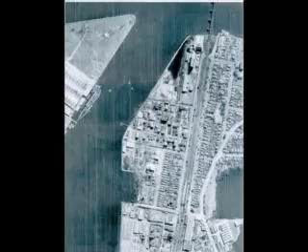The Rhodes Peninsula is an industrial wasteland. Over the last 2 centuries, it has hosted a series of environmentally disastrous activities which have left the soil soaked with pollutants and the water saturated with poison. In the 18th century, the peninsula was a residential area.

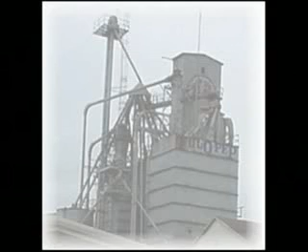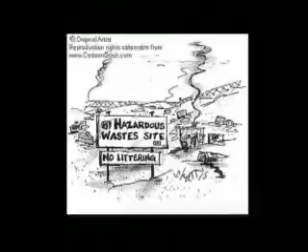In 1930, Allied Feeds established a flour mill on the site. A timber treatment plant was added in 1942, then a gasworks. Then during World War II, an explosives factory. Union Carbide reclaimed land using industrial waste, then pesticides and herbicides were made on the site. Chlorobenzenes, chlorophenols, dioxin, furanes, and Agent Orange.

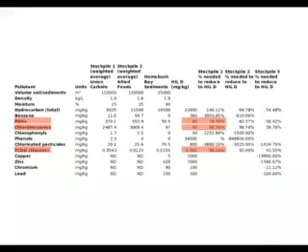Today, internationally renowned environmental scientists agree the peninsula is one of the most heavily polluted sites in the world. Current remediation by developers has pushed down the levels of most pollutants detrimental to the environment or to human health. But, according to the National Environmental Protection Schedule, the levels of chlorobenzenes, PAH, and dioxins still exceed the HIL D standard and need immediate attention. In order to meet the HIL D standard, we must lower the levels of these pollutants to 1% of their current levels.

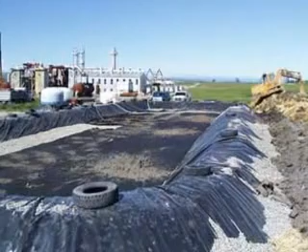The traditional narrow-minded way of approaching this problem is to use a messy technique like thermal desorption, or a slow, tedious technique like in situ biodegradation. EcoImpact knows that developers can't wait around. Our method uses cutting-edge technology to bring the entire site to standard within 1 year at a competitive price.

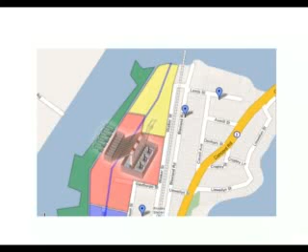Let's take a look. First, the site on which the plant is to be constructed will be excavated to a depth of 5 meters. This allows construction of the plant to commence immediately on the floor of the excavated pit, the walls of which will be reinforced with concrete. Once the plant is constructed, excavation of the rest of the soil will commence.

The Rhodes site will be partitioned into 10 meter by 10 meter cells. Excavation will begin at the northmost cell and work southwards in east to west rows. This prevents rainfall from washing contaminants from untreated soil into the cells which have been backfilled with treated soil. Water sprays will be used to suppress odor and dust emissions. Excavated soil will be transported by truck to the stockpile area of the plant. Once the soil has been treated, it is backfilled in the same east-west pattern.

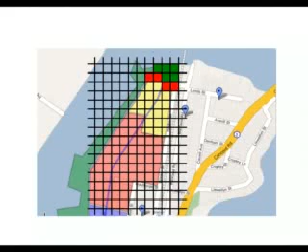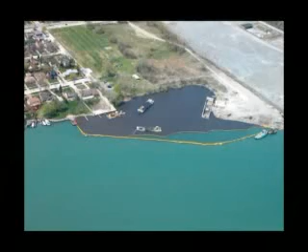The Homebush Bay sediments will be extracted using a floating dredger, which pumps the sand into a waiting truck. It is then processed in the same way as the soil. Silt curtains will be put in place to prevent sediments from building up in unwanted areas in the bay.

Now onto the plant itself. The lower part of the plant machinery sits at the base of a pit, 5 meters below ground level, while the upper part is contained within a warehouse. Let's take a bird's-eye view of the path contaminated soil takes through the plant.

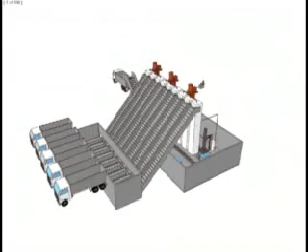When a truck carrying excavated soil arrives at the plant, it dumps it through the warehouse dock. Water is sprayed onto the soil to minimize dust pollution. A soil grader separates out large rocks and waste, dropping the soil into this covered stockpile area. At night, when excavation ceases, the dock can be closed to add an extra layer of soundproofing. The majority of the plant is underground, and as this graphic shows, the upper portion is well sealed and whisper quiet.

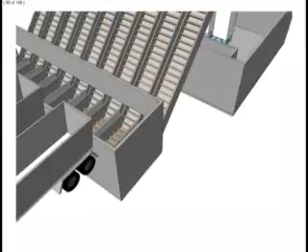When an extraction tank is ready for filling, soil moves up one of these conveyor belts, where it falls into the tank along with a stream of preheated water. There are 9 of these tanks, each of which can be filled and emptied separately. Each tank is clad with thick thermal insulation.

Let's pause for a moment to look at the cutting-edge technology behind the extraction tanks. For decades, chemists have known that water above a critical point of 374 degrees Celsius is capable of dissolving certain organic compounds which at normal temperatures are insoluble.

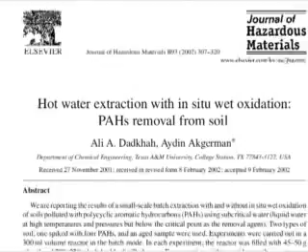Unfortunately, water at this temperature is corrosive and hard to manage, and hence impractical for soil treatment. However, recent research has found that certain combinations of high pressure and temperatures below the critical point can also dissolve specific organic compounds.

Both lab and pilot-scale studies have proven that subcritical water extraction can extract all the pollutants EcoImpact is targeting from nearly any kind of soil. In approximately 80 minutes, our extraction tanks literally wash the soil clean of chlorobenzenes, PAHs, and dioxins. As an added bonus, the high temperatures reduce some of the dioxins to harmless aliphatic hydrocarbons.

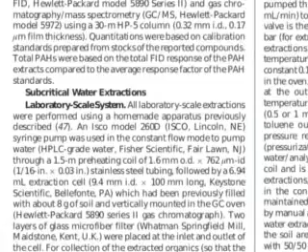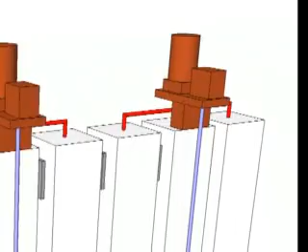Back to the plant. Once filled, the top of the extraction tank is closed with a hydraulic hatch. Pipes connect the top and base of each tank into a circuit of water, which is kept continuously moving by this pump. When a tank is sealed, the valves at each end open and water begins moving through. The pump and the heater on the main water circuit cycle the water through a series of temperature changes, which maximizes the efficiency of extraction. The pressure is kept constant.

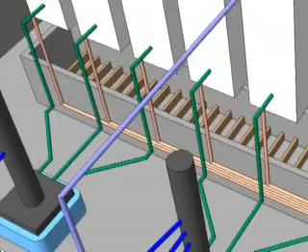This chromatograph monitors the dissolved pollutant content of the output water, giving feedback to a control computer, which can recalibrate the temperature changes to target particular pollutants. Once the chromatograph reports that the tank is free of pollutant, the tank is disconnected from the circuit, and a hatch at the bottom dumps the soil onto this conveyor belt. The belt carries the soil to a belt press, which removes residual water for recycling, and then dumps it directly into a truck which backfills it into the site.

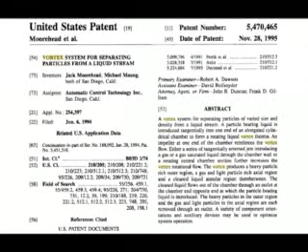The contaminant water output from the extraction tanks is fed into the centrifugation vessel and mixed with powdered activated carbon. The activated carbon binds up all pollutants found in the slurry. The contaminant-bound activated carbon is then separated from the liquid phase via vortex centrifugation. The vortex centrifuge is a patented process for rapidly siphoning suspended particles out of a liquid.

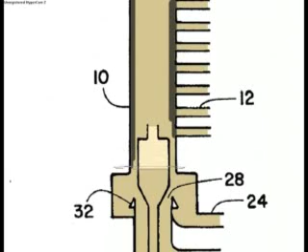An electrical motor induces the water into a vortex flow. The centrifugal force drives the heavy contaminants to the vessel wall and into the collection tank in the vortex base. Lighter contaminants and gases are passed through the central outflow line and into the collection tank. The clean water passes through the annular outflow chamber to be recycled back into the extraction vessels.

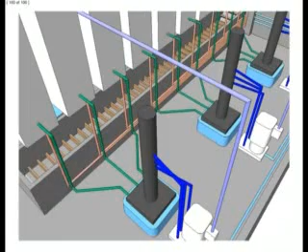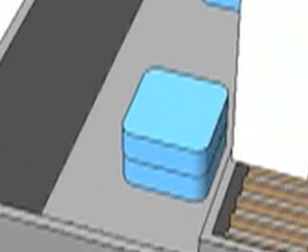Once the collection tank is filled, the vortex is isolated from the circuit. The tank is removed and a fresh replacement brought in. The filled tank must be handled carefully, as it contains high concentrations of dioxin and other toxins. As soon as it is removed, it is inoculated with microbial starter culture and sealed with a specially adapted lid. Hoses for oxygen and nutrient injection are attached to ports in the lid, and an agitator is inserted. The tanks are then stacked in the storage area below the conveyor belts.

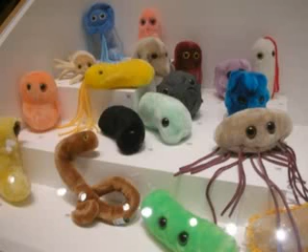The microbial inoculants consist of 3 bacterial species: Sphingomonas yanoikuyae B1, which degrades PAHs, Sphingomonas wittichii RW1, which degrades dioxins to chlorobenzenes, and Escherichia hermannii, which degrades chlorobenzenes. These species have been chosen because of their ability to degrade all 3 pollutants to below the HILD level within a short period of time. Based on past experimental results, the time required to fully remediate each tank of sludge will be 22 days.

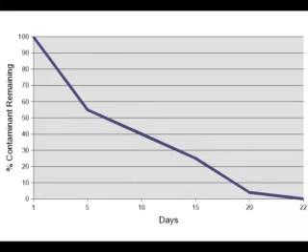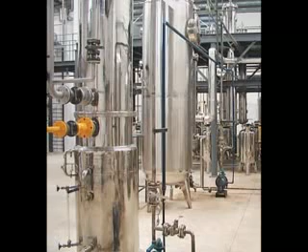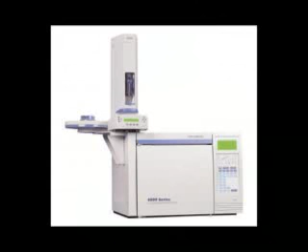The nutritional requirements of the bacteria are simple and can be met with commercially available media. Oxygen and agitation within the tank will encourage rapid microbial growth and activity. To save energy, the bioreactors will maintain an optimum temperature of 29 degrees Celsius using the same heat exchange pipes as the extraction tanks. Because each microbe can utilize its target pollutant as sole carbon source, the entire process is self-limiting and self-contained. Once the remediation is complete and the pollutant level is confirmed by chromatography, the harmless and nutrient-rich sludge will be simply spread across the remediated portions of the